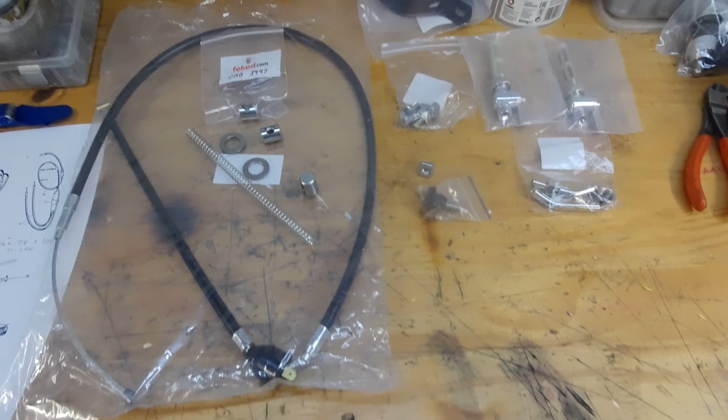A few little jobs to go on with today, or in this video.

First of all, got the brake cable to fit to the conical hub.

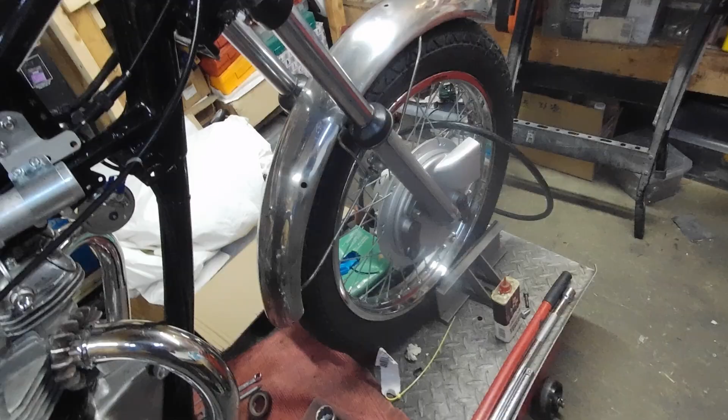Also got a pair of taps for the new tank and some unions, so we've got a reserve and a main, and also got some bits for the exhaust.

I've got the silencers now, we've got the brackets there. I've also got the long strap which goes underneath, and fixing bolts for these brackets for the silencers.

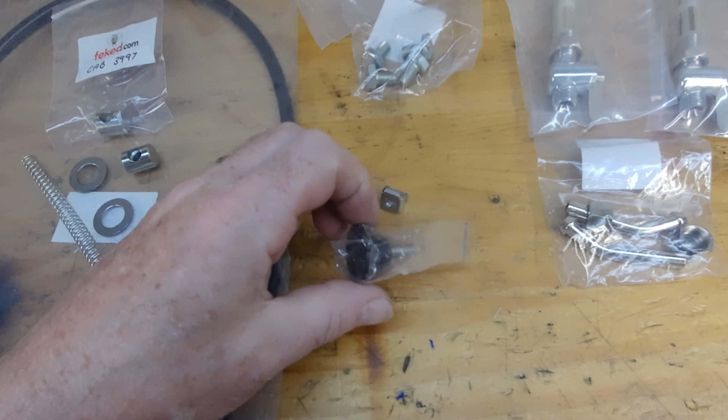Also got the little bits for the side panel, so that's the knob and the little captive nut. So yeah, there's a few little bits and pieces we can get on with.

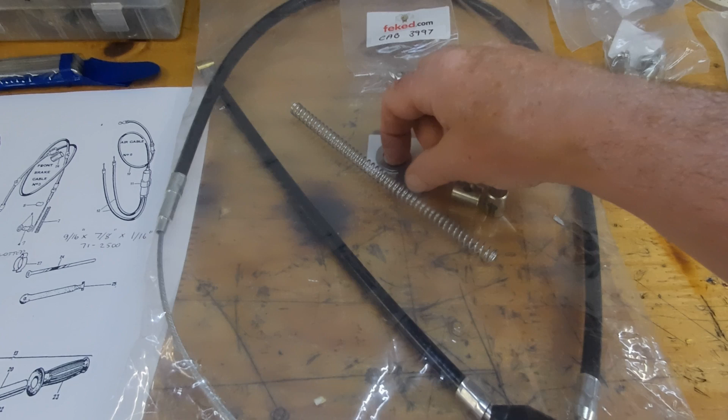I think first of all we'll do the cable. Right, so got the cable, got the spring, got the trunnions, and a pair of washers, which I've actually just had to bore out a couple of ones I had because I didn't have the correct ones.

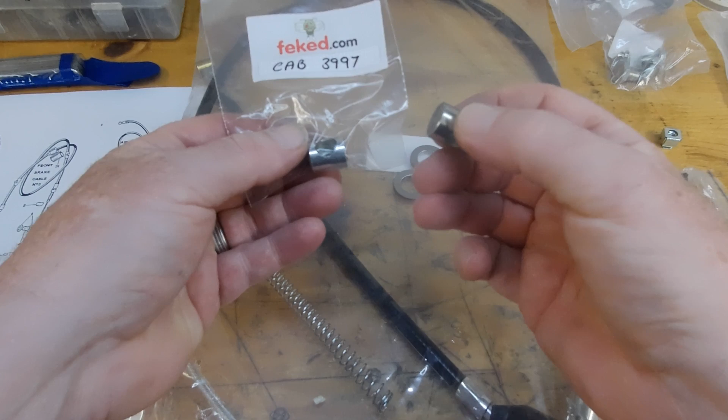I've also got one of these closed trunnions from a different supplier. Don't know whether that comes up on camera, but this one here has a slightly bigger bore than that one. So whichever one fits best is the one we'll use.

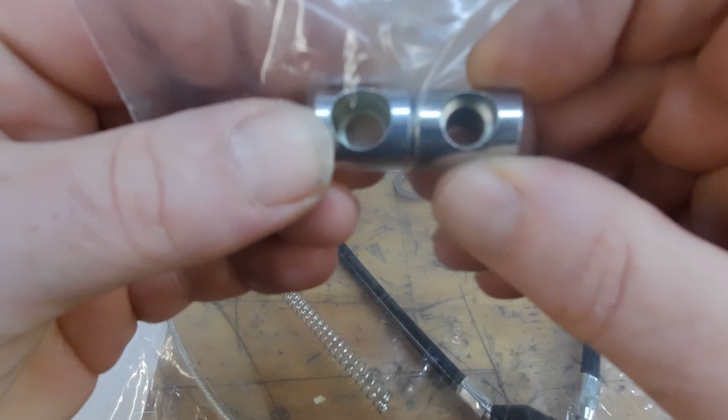Well, these ones came as a pair, so we'll try these ones first. Yeah, and the other thing is this parts list - it's not actually shown correctly.

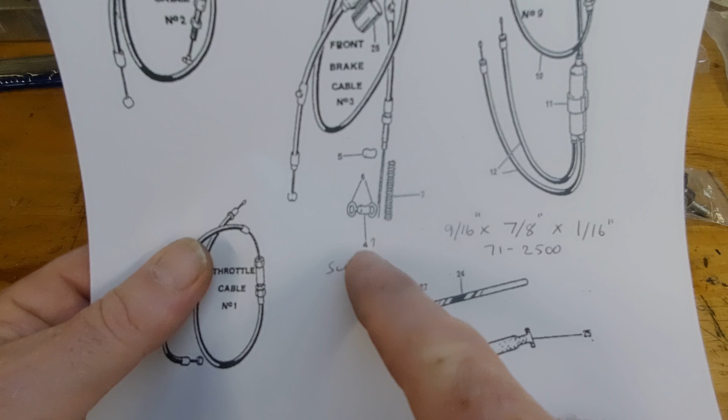So the washers go on the split trunnion, which goes up at the front of the bike, so to speak. They've shown the washers in the correct place at this end of the cable, but they put the wrong part number against this trunnion. So the part number in the parts list is the wrong way round, which is a little bit confusing. Just something to watch out for.

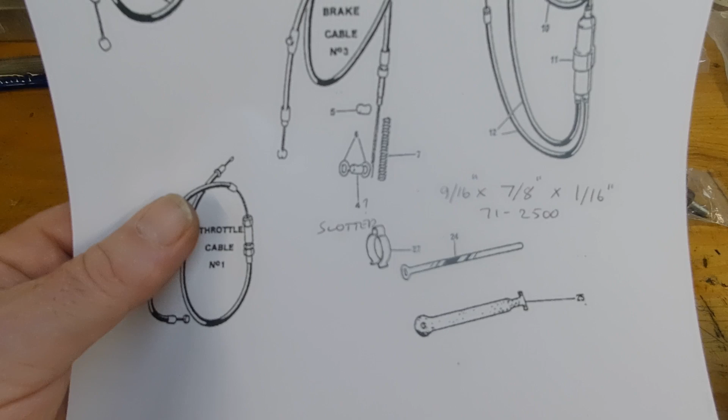If, like me, you're building this from bits, so you haven't had the original one to take to pieces, you're not really too sure - you have to go by information you can find. So that's just that pointed out.

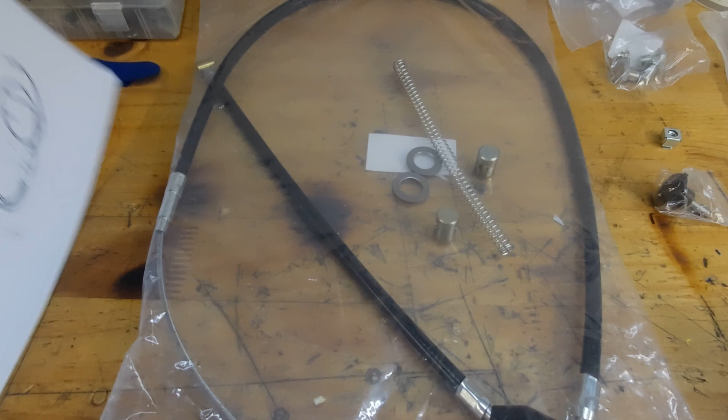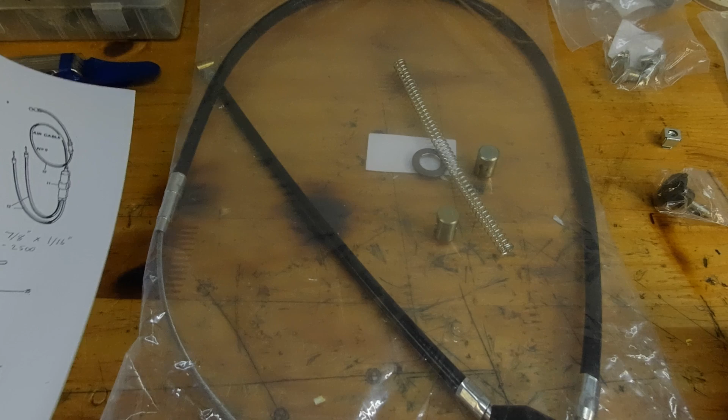Right, so what we'll do is I think I will just raise the ramp a little bit on the bike, make it a bit easier to work from. Oh yeah, these washers should be 9/16, 7/8 and 1/16 thick, and that's the part number there, 71-2500. Okay, let's get the bike up on the ramp.

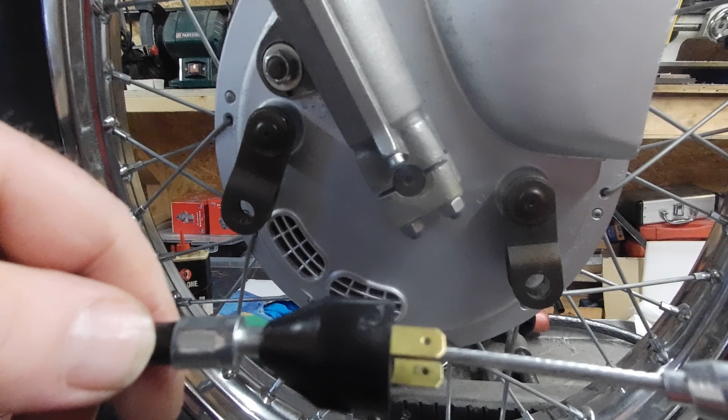Right, so straight away we have a little bit of a problem with this cable. This has got a built-in switch, which I'm not particularly bothered about using anyway. I'm guessing, I don't quite know how this switch is triggered when you pull the lever - can't quite see how that works, but it's very loose on there.

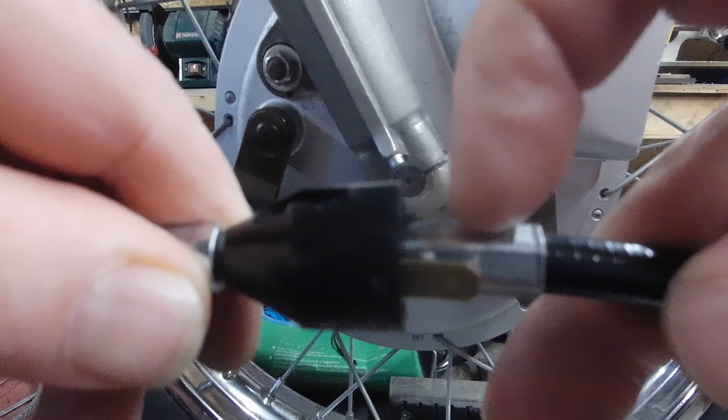What I'm guessing is that cable is meant to be butted up together with that switch like that. But look at those terminals actually touching the end of this ferrule on this cable - so unless you were to bend those tabs out, it's not going to work anyway. It's a bit of a bad design.

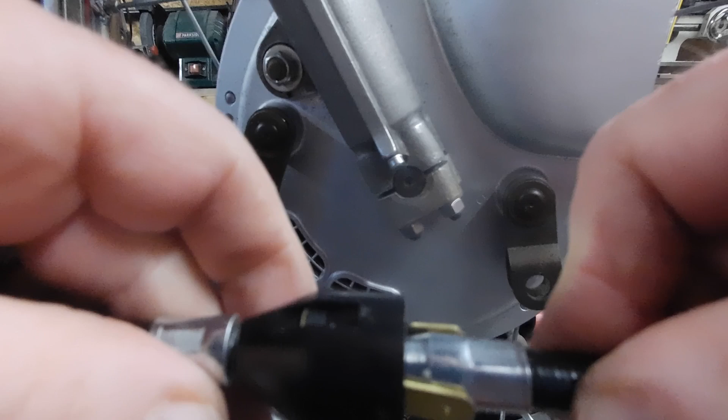Just as well I'm not going to use that. I did think about actually removing this bit altogether, because I think they're supposed to make the brake feel a little bit spongy, but I'll leave it on there for now, see how we get on. If not, I could cut it off and just butt those two bits together or clamp them. Yeah, usual thing, isn't it?

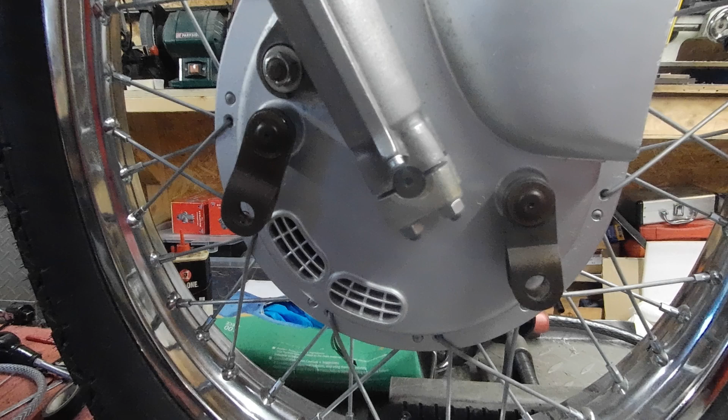Right, but let's get on with fitting the cable and not worry about that. First of all, we need to get this. I think what I'll do first is just see how well that fits on there - can we get it over?

Yes, right, so that one fits on there, which I'm guessing that's meant to. Let's see, it does seem to fit okay. Let's just try the other one.

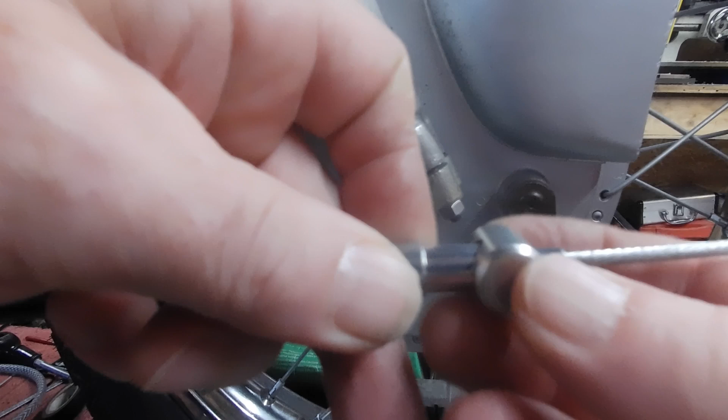So this is the one with the bigger hole in it. This time I'll look through the back of the camera and make sure we're actually in shot. Yeah, and that does also fit, but it's a slacker fit there. So actually, does that go a little bit further on there than the other one?

Let's try the other one back on again. Yeah, so this one hasn't got such a deep bore on it. I think what we'll do is go with this one to start with and see how we get on, because all it's going to do is give us a little bit of extra length on this bit here.

Right, so get the rear end of this cable out of the way. That needs to go in there. So we've got the counterbored end, if you like, not that end, but the counterbored end that way, and pass the cable through like that. So that's how that's going to sit.

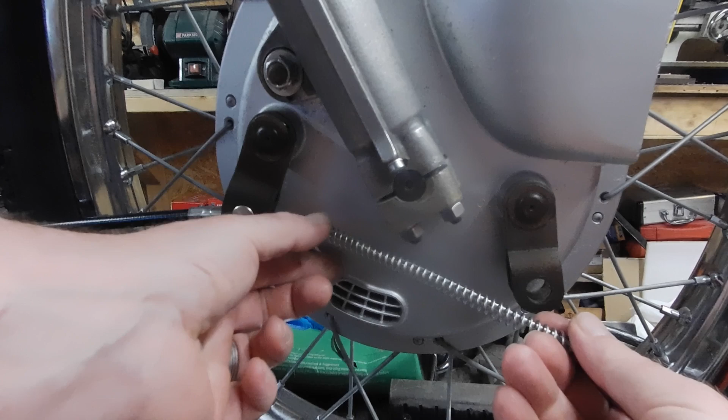And we have this spring, feed it on. Straight away we're under tension - have we still? Let's push this sleeve together, just taking the slack out. Right, let's have another go. Through there, through there, through there.

Right, and this bit is where it gets a little bit fiddly, I think, because we've got like 3 hands needed. Right, so a washer needs to go in there - this little bit.

The open end needs to face forward. We need to push that through while holding the washer, getting the slot over the cable. Hold the washer, slot over the cable - easier said than done. A little bit more. Completely lost the washer now.

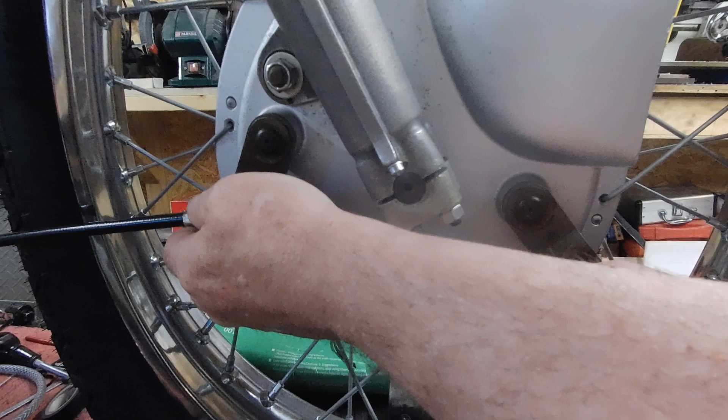Not the best idea, and I've lost the slack up the other end. Sleeve pushed together. You're going to have to get some tape or something around that. Keep that end in, that in there, that in there. Tension on that spring.

Too far. Through the slot, right. Now I just need to get the other washer in there without everything falling to bits.

I just need to spread these a little bit, they're closed in, not quite enough room for the nipple. There we are. So that's that in, that one in there. Spring is where it should be, so just got to run the cable up to the lever.

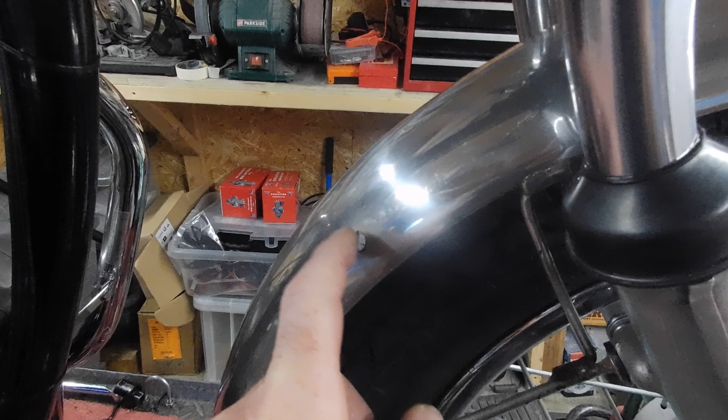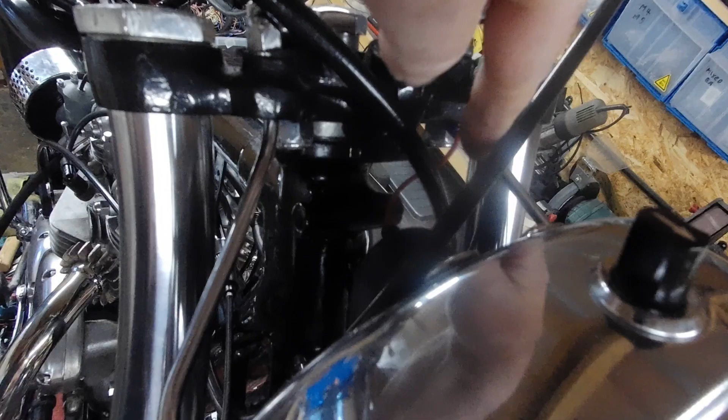Only thing I haven't got is the thingy that goes in there, a little cable bit, so I'll have to get one of those, but at least we can get the cable in place. So I'll just do the rest of that - there's that end in. And I've actually run it over this side rather than up here because of the length - it is possibly a little bit too long.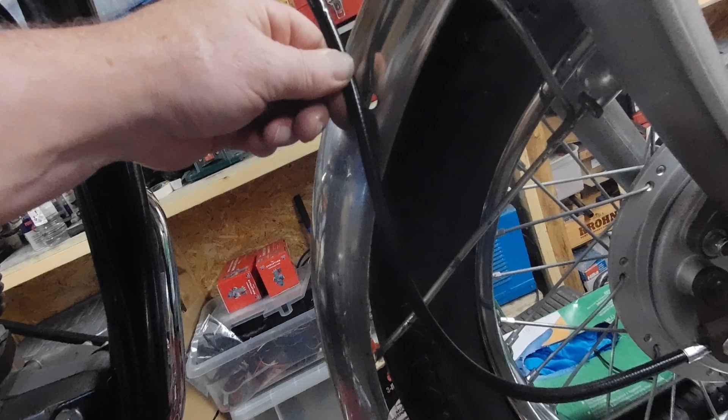Yeah, once that goes, it's quite a heavy duty cable actually. So once that's back there, let's clip - yeah, that should sit about right. Yeah, that was too much on this side, so we crossed over to the other side. So we've got the front brake cable coming up this side of the headlight, and the clutch cable going down this side.

Right, well that's that. I haven't put any lubrication in there as yet. I'm not sure if these are plastic lined or not, I'll need to have a look at the listing just to check. I'm not sure if that actually needs any lube or not. We'll probably put some grease up here anyway, and on these trunnions, grease those up. I just wanted to get it on there dry, make sure it's all functioning first. So that's that little bit done, and there's always fettling to do to get it to work, get it to fit, but we're there.

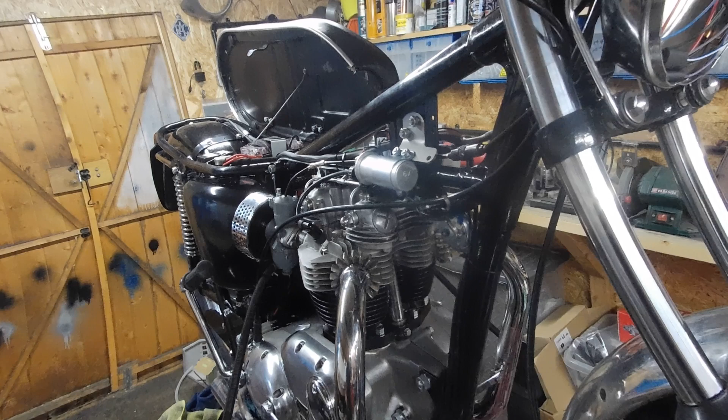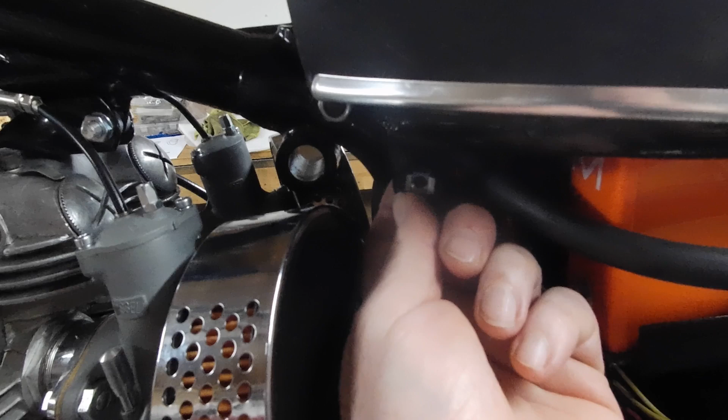Right, so next thing, well, just a little job, just get that on there, make sure that all works. Then I think we might do the pipes. Right, I've got the little nut in there, just clipped it in from the back. I'm going to assume that's the right way round - makes sense to me because the thing's pulling this way, so it can't pull through. If you put it the other way, it could possibly pop out, so I'm going to assume that is correct. And also I've just got my rubbers on there, and again I'm assuming I've got them on the right way round. Right, well, let's give it a little try. I'll have to just put the camera down for a bit.

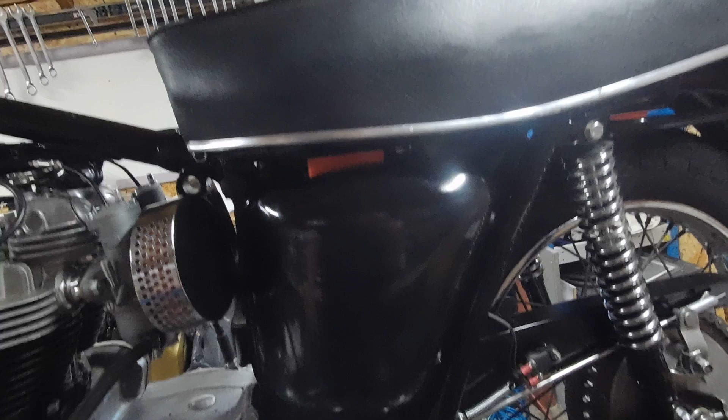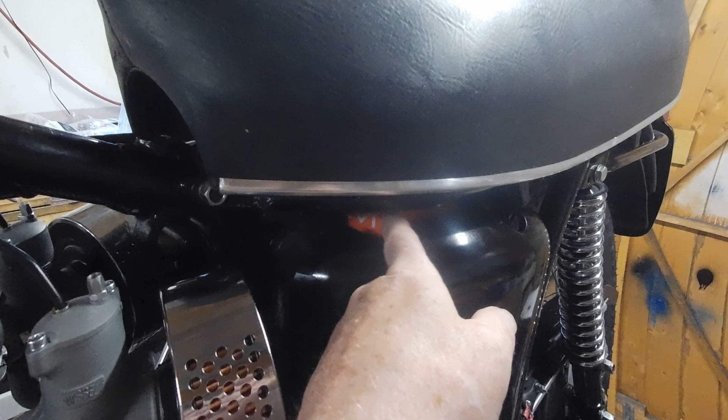Well, that's that on there. Not sure about this gap at the top here. Well, that's right, also got that little cut out there for the hinge. Does seem to be a big gap here, whether that's the right panel or not - I assume it is. Unfortunately, because I've got a bright orange battery, you can actually see it. But well, that's on there anyway.

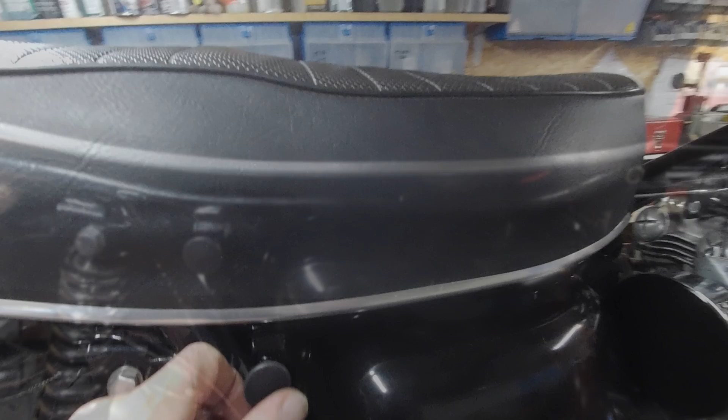Okay, let's just check that the seat actually lifts up still. Oh, there we go. Yeah, well, the seat still lifts up anyway.

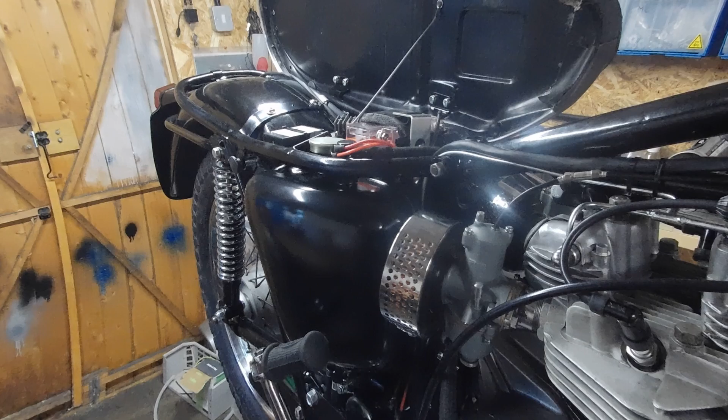Okay, so we'll now get on to doing the pipes. Clear a little bit of this stuff out of the way, and back on the tripod, I think.

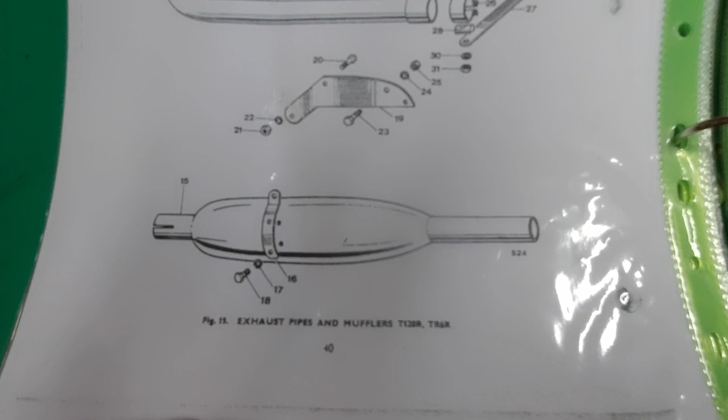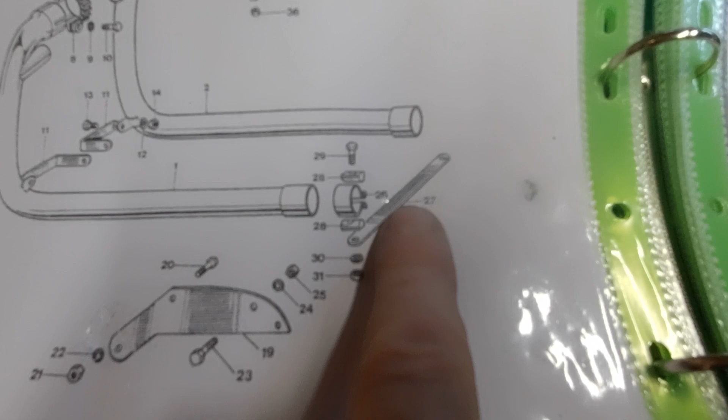So this is the parts book. So there's the bracket, bolt, spring washer. There's also bolt, nut and spring washer for there, although I've got no locks, so I'm just going to be using flat washers and no locks. So we've got this piece here, this cross brace, and the clamps. So here we have it, here's the bracket.

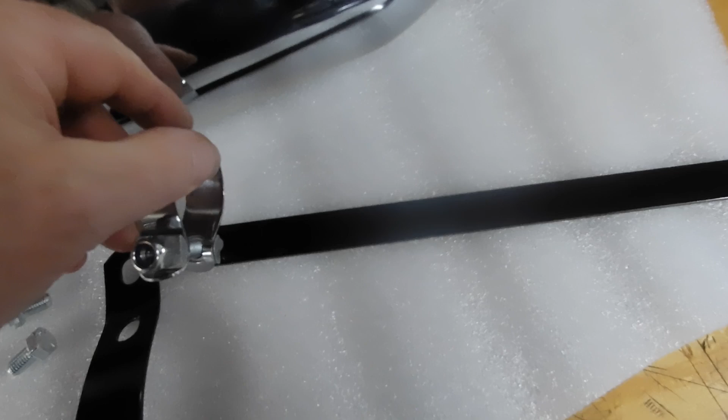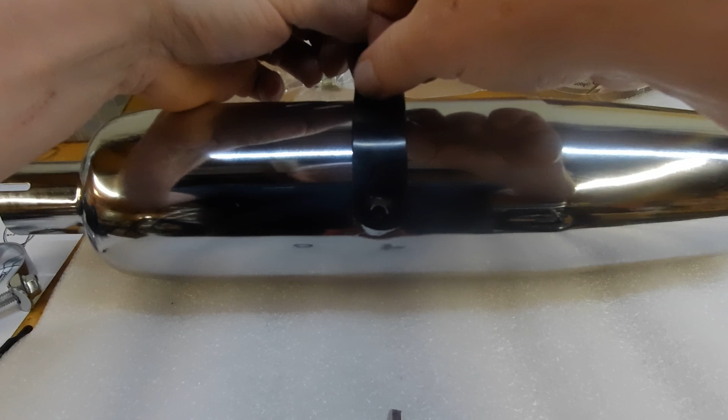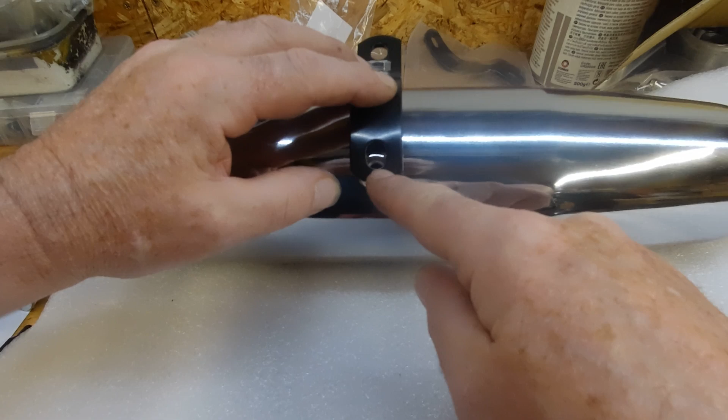Straight away we have a problem. This bracket does not want to line up. Well, would you believe it? Let's just loosen that end right off. Oh, we might get it to go. Yeah, that's not a very good fit, is it, really?

I'm going to assume that as we tighten that up, that's going to form the correct shape. It's a little bit out of shape there, isn't it, considering how loose they are at the moment. So there's not going to be a lot of movement there for adjustment, is there?

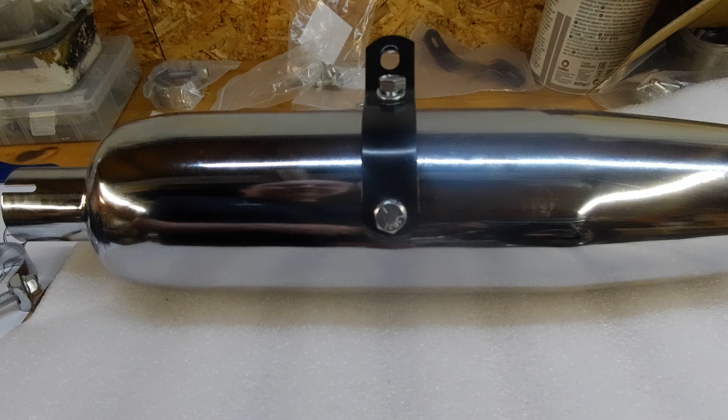Actually, are they half inch? Yeah, they are. Well, they would be, wouldn't they? Because they would, even if.

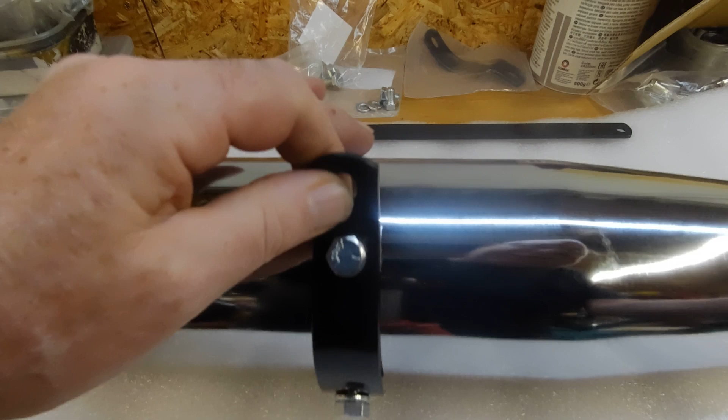So much for having a loose fit. Well, that seems to be pulling down anyway. Yeah, that's pulling into shape. But there is no adjustment in them slots. I suppose I could flatten that a bit. We'll see how we go with the fit. If the fit's okay, I shan't worry. If it doesn't and we need a bit of adjustment, I'll have to flatten that bracket a little bit, I think. I don't want to risk cracking the powder coat on it.

Yeah, you can see it's not quite. Hopefully you can see - well, I can see. Look down, that's hard to get the camera lined up on it. Yeah, you can see it doesn't quite follow the curve, it's a little bit high here. Right, well, that's the bracket on.

Clamp has got to go on. We'll just loosen these off. That was pretty loose. So that would need to go that way, wouldn't it? Yeah, for this bracket to fit under there. Can't even see, can you? Yeah, so that has to fit under there.

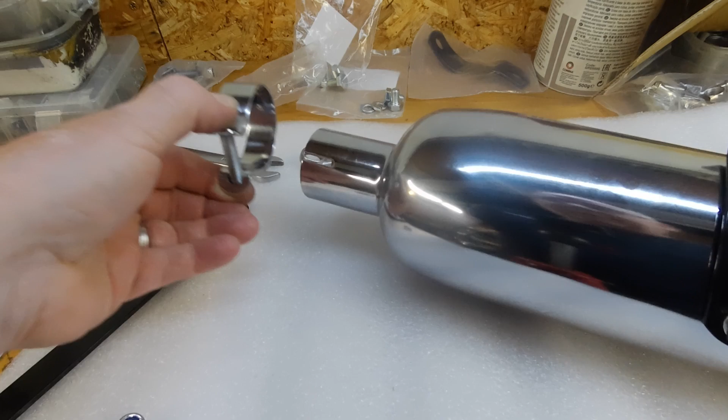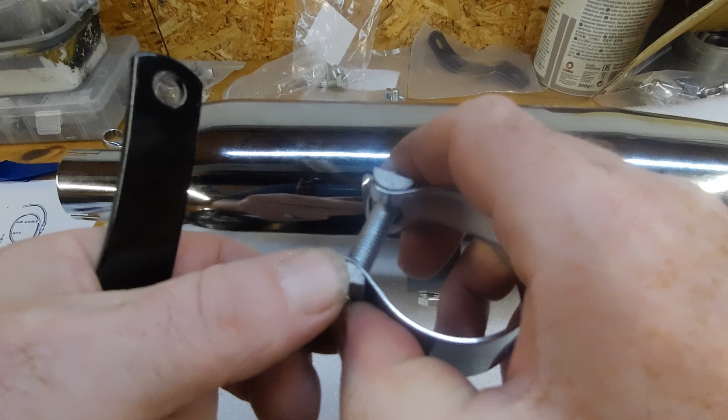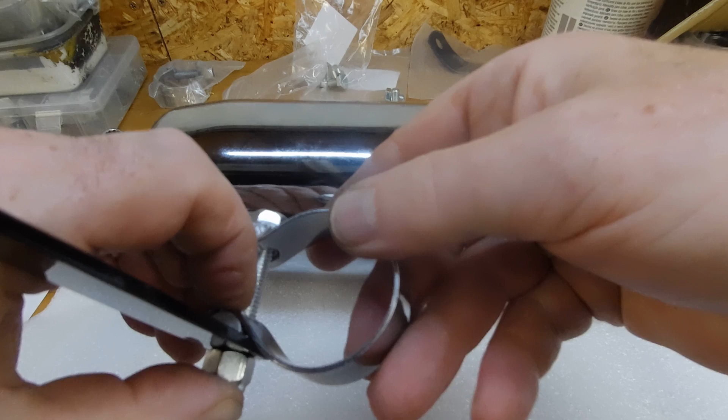Actually, you could. I don't know if that's going to work with these brackets, is it? Oh, yes it is. Yeah, that - like that, that through there. Get that started. And hopefully there's enough. Although it doesn't look like there's going to be. Cool, just about. Right.

So that's how that goes, I think. Right, let's get this one on. See what we've got.

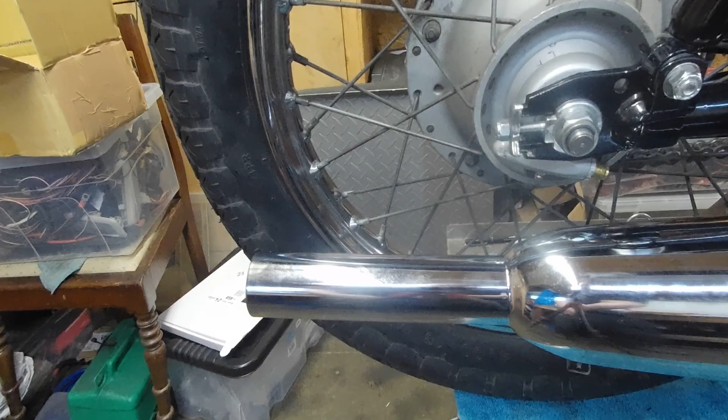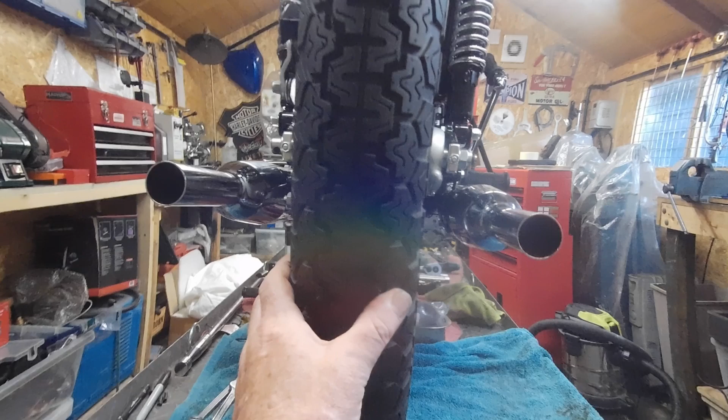There we are. Pipes fitted. Although for some reason they do seem to be at different heights, so I'm going to have to do a little bit of messing about there. In fact, that might be them brackets.

Yeah, so it looks like I'm going to have to flatten that bracket out a bit, because they are definitely - I think they are - unless the bike is tipping one way, might be slightly. Yeah, so there's a little bit of adjustment to do there.

I'm going to have to get some longer bolts if I want to use these Nylox here. These are 3/4, I need some inch bolts for there.

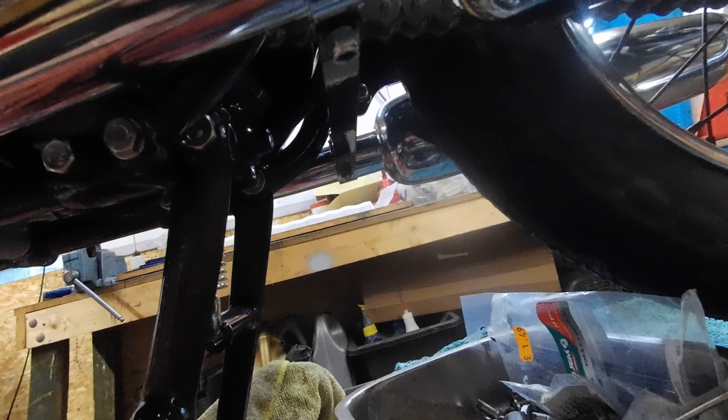And that's the strap underneath, and that is quite fiddly to do. So you can kind of see why people tend to leave it out. But I think what that stops - I think if you don't fit that, the pipes kind of sway a bit. I think that's what happens.

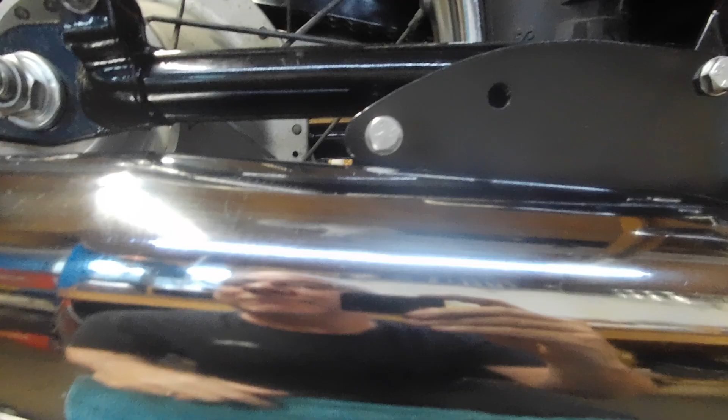Right, so just got a little bit of adjustment to do to get everything to sit right. Yeah, so it just wants to be raised on there, doesn't it? Might just be able to loosen that off and raise it up, and that might bring it square. Yeah, so we've got a little bit of adjustment.

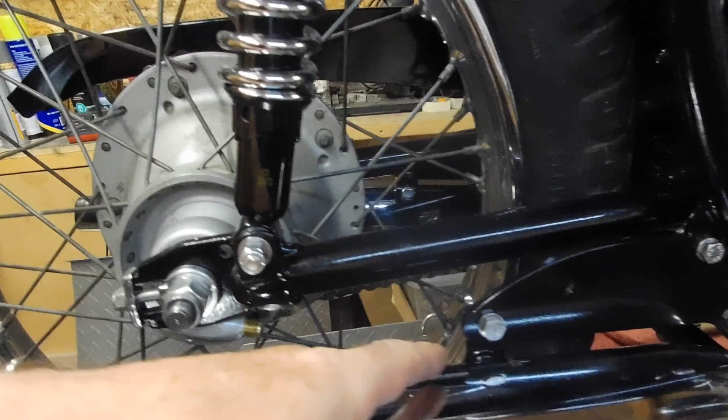Yeah, that is definitely sitting closer to that bracket. Right, so there's a little bit of adjustment on this whole bracket. Take that off, I'll see if I can raise it first. If not, a little bit of bending on that bracket. But that is going to be roughly it for the exhaust.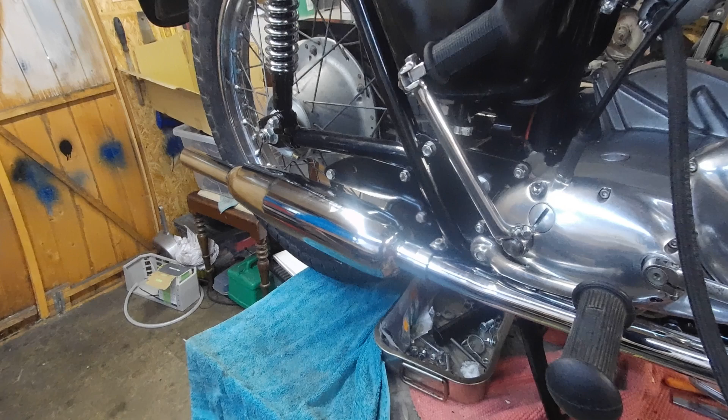Yeah, and I think these are also over the £150 threshold for free carriage, so by the time I factored everything else in, it was just as well to go with these. Though I do actually like the look of the pea shooters as opposed to these.

Yeah, so it's coming along nicely.

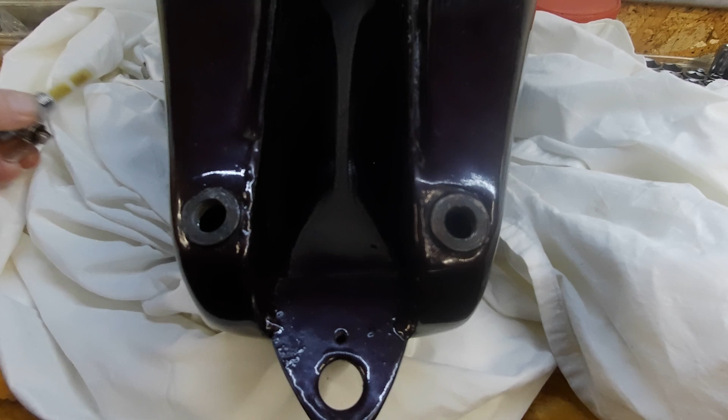Okay, fuel taps. Well, I've got these fuel taps here. That one has got a stand pipe inside it, so that's the main. And this one, well, still in the wrapper, it's probably hard to see. There's no stand pipe in that, so that's the reserve one.

And as I showed previously in my unboxing of the tank, when I had to recut the threads and everything, you can see just how loose that is in there. Absolutely atrocious, really.

So yeah, we're going to have to give that a bit of double leak protection. So we're going to have to go over with some PTFE tape. Unfortunately, I've only got the standard stuff. Would have been better if I had the gas tape. It is slightly thicker.

And I'm also going to fit washers. The name is completely gone from my head now. Dowty washers, that's what they are. Yeah, so 1/4 inch Dowty washers. I'm going to fit those as well, and hopefully we won't get any leaks.

Yeah, I mean the PTFE more than anything is just to stop it from rattling so much.

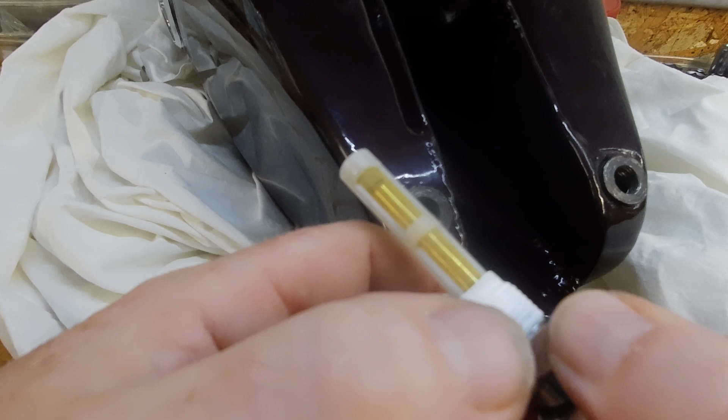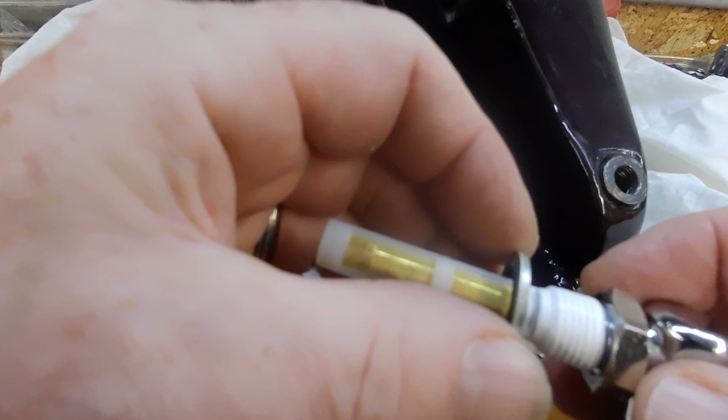I think that might be about it for that. Dowty washer. You can see that is tight. Getting that over. And I think I'm going to wind in as much as I can and then just tighten up with that.

Right, so this is when we flipped over the right hand side. So we're going to have the main tap on the right and reserve on the left. And the phone is now going. Excuse me. Right, we're back.

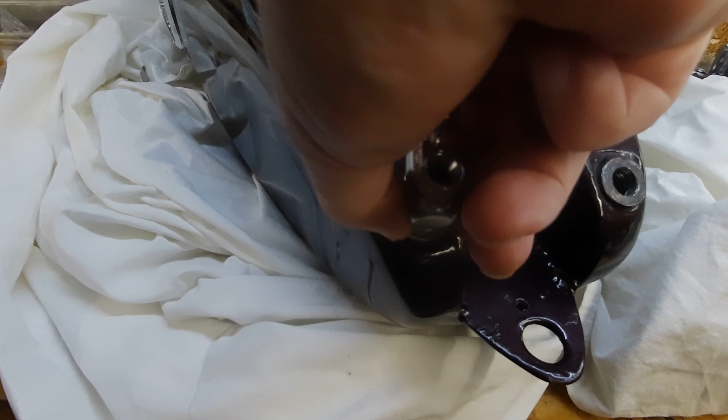Okay, right, let's get that as far in as I can. Don't know if I'll get another turn on that. No, I won't. Right, so that'll have to be there. And tighten that down.

3/8. And yeah, hopefully we won't have any leaks. Of course, I don't really know that just yet.

I'm still waiting for the choke cables to come, or the rest of the bits to make up the choke cables, so I'm not going to bother putting the tank on until then.

Yeah, so I've got that's the tap. I'll do the other one off camera. No point in seeing that again.

And then I have these, and hopefully these will be the right sort of angle. Have those little fittings to go on there. Again, until I get the tank on, won't really know, so I'll leave that off for now.

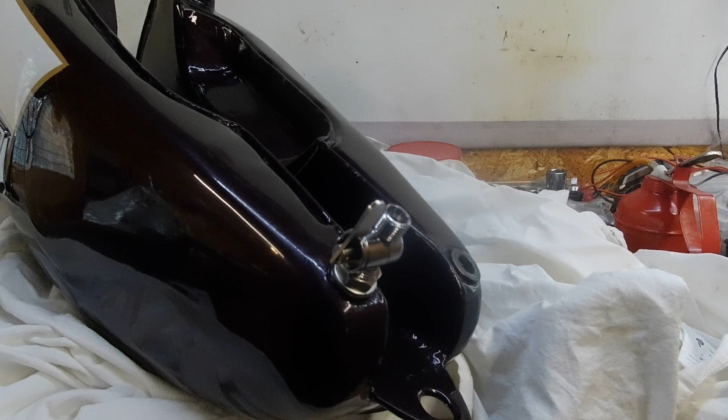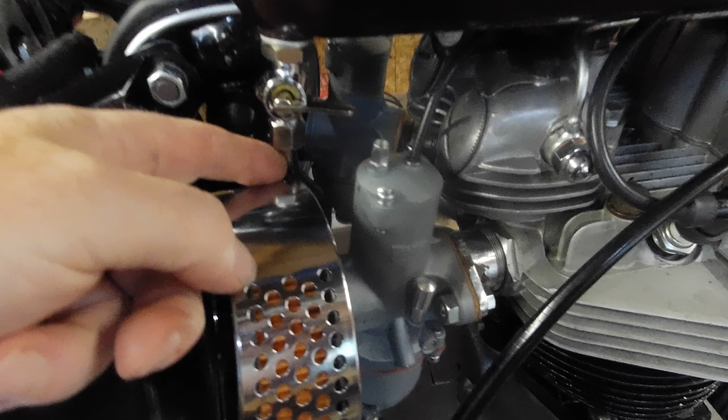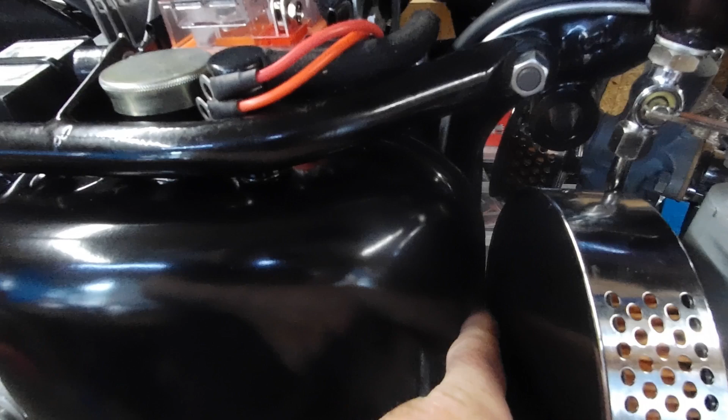Right, so I'll get this other one in. And we have yet another problem. Right, so even with my riser, that's not even fully down. That is touching the filter. And I can't move the filter back because it's practically on the oil tank. There's a very small gap there.

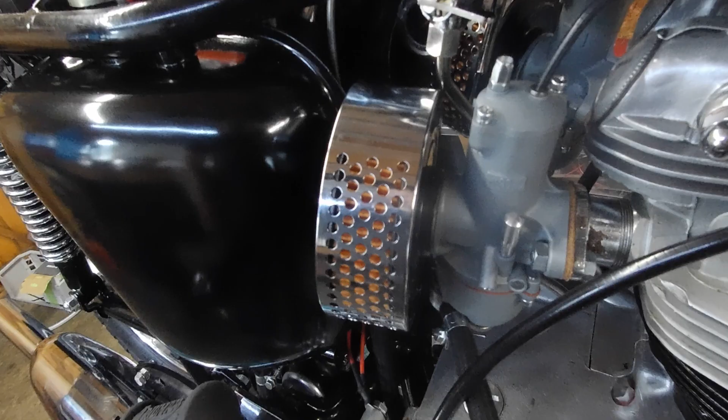So maybe I'm going to have to find something which fits this a little bit better, with a sharper angle on it. Or just have bell mouths, no filters, which I'm not that keen on, as we have a nicely rebored engine. I don't really want to be drawing grit in there.

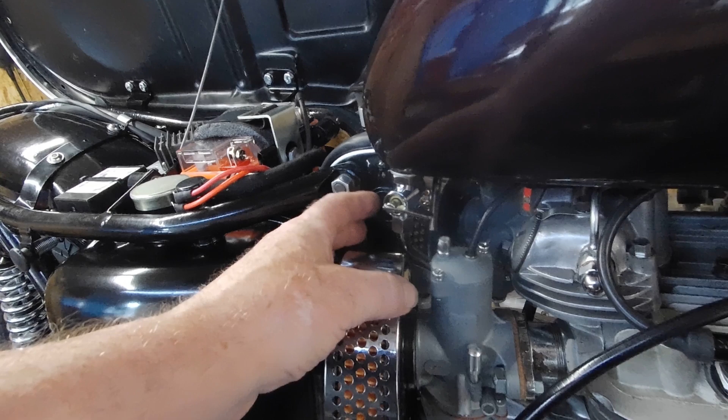Right, I'm going to have a look through my bits, see if I have got another union. If I haven't, I might have to order something to see what we can find. But that is just not going to work like that, unless I make copper pipe, make my own union elbow. Might be the only other thing. Forgot if I can get some copper pipe in this. I've got flaring tools. Yeah, that might be the only other thing.

Right, see what we can find.